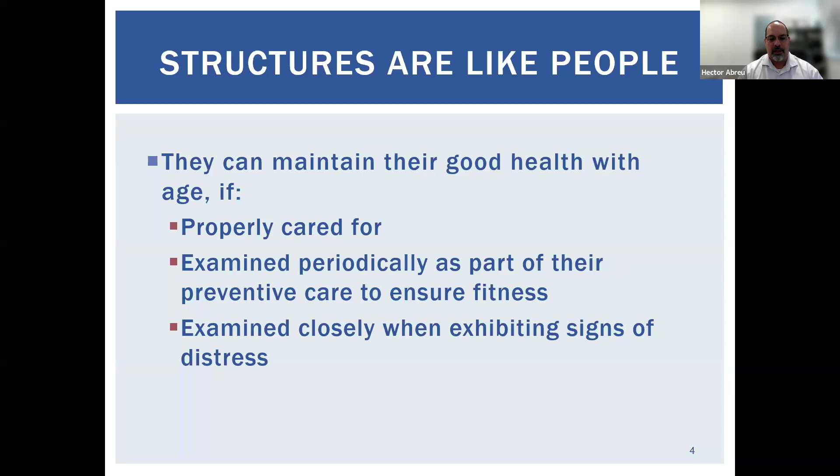Structures, like I said, are like people. They can maintain their good health as they age if properly cared for, examined periodically as part of their preventative care, and examined closely when they exhibit signs of distress. And we're going to show a couple of pictures about distress and what association managers can do for their building, including their maintenance. We're going to have a plan for that today.

Like people, all structures deteriorate with time. If you have a parking garage, you're going to have car loading coming in, coming out. You're going to have heavier equipment than it was originally probably designed for. Those kinds of things put stress on a building, and that kind of movement creates some kind of deterioration on the building.

Exposure to the elements. We live in Florida. We get hit by hurricanes almost every single year, right? Either on the left of Florida or the right of Florida, we all get hit at one point or another. In addition to that, you can count on weather change. Right now in Fort Lauderdale, we were 55 degrees this morning, and we're going to go up to the 80s. That causes the material to move because it will shrink and will expand, right? Those are the kinds of exposure to the elements your building goes through.

Aging of material, as with everything else, and like probably all of you have learned so far, we go through a life cycle of material, right? What is the life expectancy of those materials? What is the life expectancy of your paint, your waterproofing, your roof? Those are the aging of the materials that protect our building.

Wear and tear from normal use. That will be if you go to your walkway, how many people go out to the elevator? Usually when you go to a building, you will see that the elevator area is beat up, while the area farther away from the elevator looks a little bit more pristine, right? That is because of wear and tear. People are coming in and out every single time, in every single area. That creates abuse on the building as well.

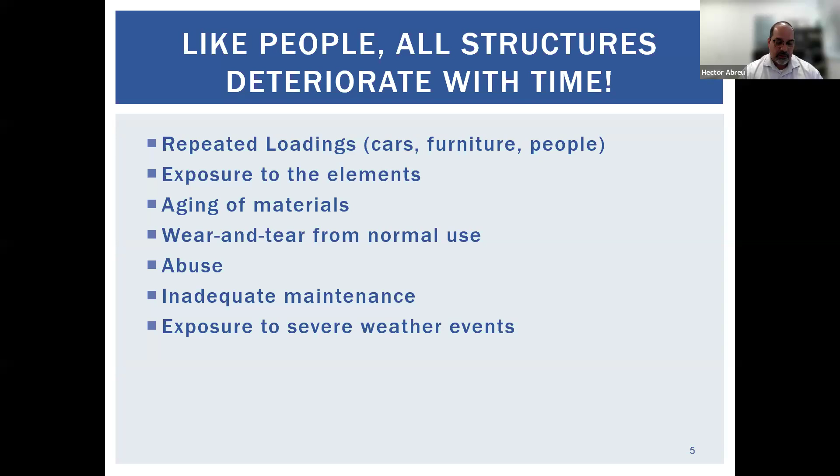Inadequate maintenance, exposure to severe weather, like we talked about before. Inadequate maintenance will be, hey, I know I got a patch there. Instead of calling a reputable contractor, no, let's find something at Home Depot, put it there, cover it up, and that's it. That will continue to deteriorate the building and will cause strength reduction in the building, which is something that we don't want, and most of our panelists here do not want to be confronted with either.

All structures deteriorate with time. During hurricane season, we get very strong winds. We get a lot of wind coming in. Wind comes from different directions during our hurricane seasons, right? So we're going to get water in through the windows. We're going to get water in through some openings.

2 years ago, 3 years ago, we got big storms that happened one after the other on the east coast of Florida that took away almost half of the east coast. A lot of seawalls in Daytona were lost. A lot of buildings were on the verge of collapse due to losing their seawall. Those seawalls were there for 50, 60 years probably, and this storm just destroyed them. You can go back to the news and see them. I worked on 2 of those buildings in particular, and it was a challenging event for those buildings.

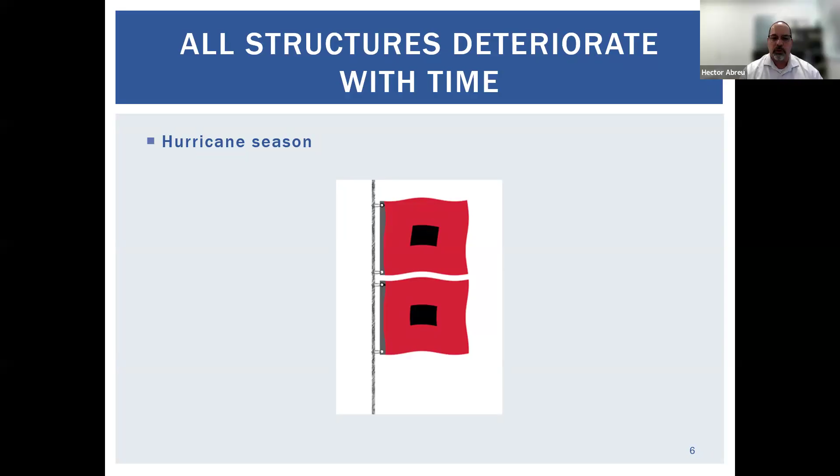So we had to reestablish safety for the buildings. Both buildings were evacuated. In both buildings, people are back in their units as normal nowadays. But those kinds of events do affect a building. Those kinds of events do create additional water intrusion into your building that will create aging and create damage to the building.

Deterioration may progress to the point of compromising. What are we compromising on a building? We're compromising strength, stability, the appearance of the building, roof leaks, piping system, water lines, fire sprinkler system. So when you just start getting deterioration, at the beginning it will be very subtle, right? You will see maybe a rust spot here, some cracking here, that's fine.

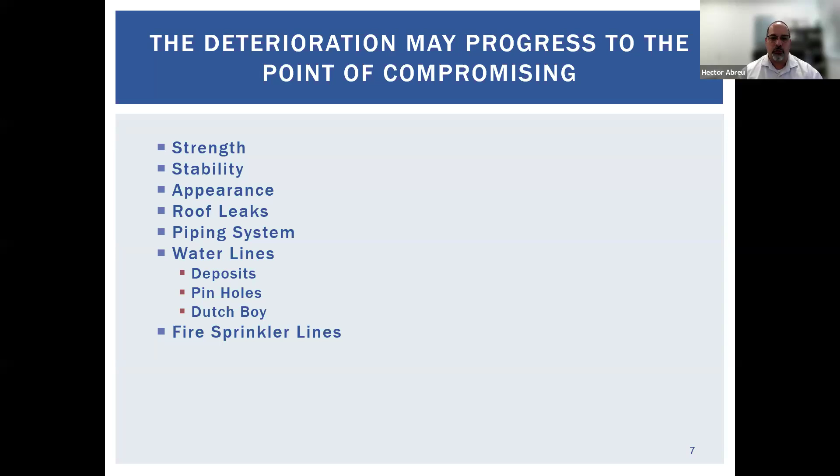Let me back up there a little bit. If I'm going too fast, please let me know. I tend to talk very fast. If you don't understand something, let me know, because I'm Puerto Rican, so I translate a lot in my head, and I make up words sometimes. So feel free to say, hey, what the hell did you just say, man? That's fine by us, okay?

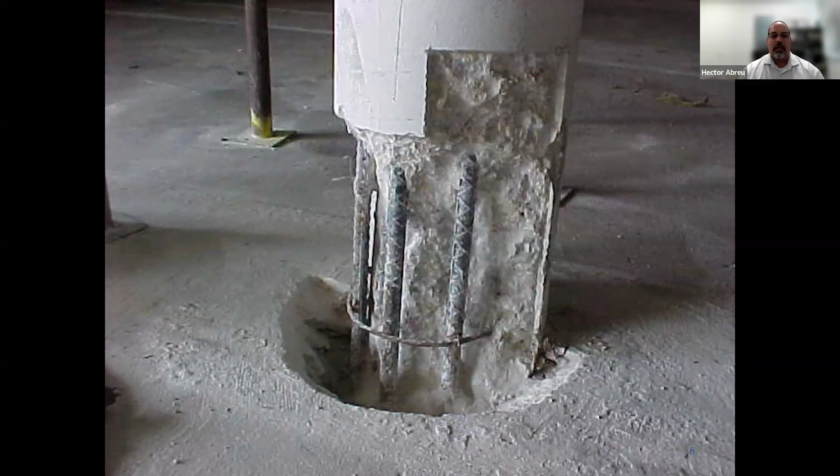Possible causes for distress. We've got errors in the original design, inappropriate materials for the environment, shortcomings in construction, imperfections in materials, natural regression of building material. So what are errors in original design? When an engineer designs something, there's a group of engineers that design it. No one is perfect. Things might be left off. That sometimes happens. Sometimes it's caught, sometimes it's not. I'll give you a simple example.

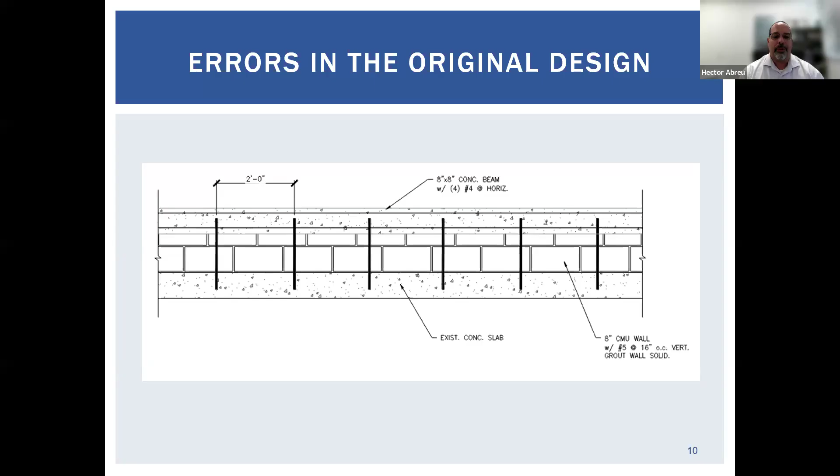Those are the kinds of things that have to be addressed, because now it's up to the interpretation of the contractor when he's on site, right? Again, you don't see a lot of those kinds of errors. Nowadays, with programs and everything, we become more and more efficient, but they still do happen. Mistakes still happen here and there.

Inappropriate material for environment. Here in Florida, we never use salt on our streets, but in New York, areas where we get snow, you will see that all the time. So imagine if you have a building and you're throwing salt when December comes, because cold weather is coming in. That salt will destroy your concrete right away. And it's an inappropriate material for our type of environment.

The same will apply to the roofing material that we use. The same will apply to the painting and coating that we use on our walkways and waterproofing. For the people that work with the windows, it's not the same kind of window that we're using, especially because down here, and Ben from City Quiet can chime in, we have hurricanes, so it has to comply with the load and the wind load that we're gonna suffer.

And to add to the insult, Florida keeps changing their code almost every 3 years. We have a revision on the code, and this year they bumped up the numbers, and now they included tornadoes as well, which is another load that originally was not included in the previous version of the code. So those kinds of things affect how your building is aging, how it's maintained. So you have to be very proactive on your end.

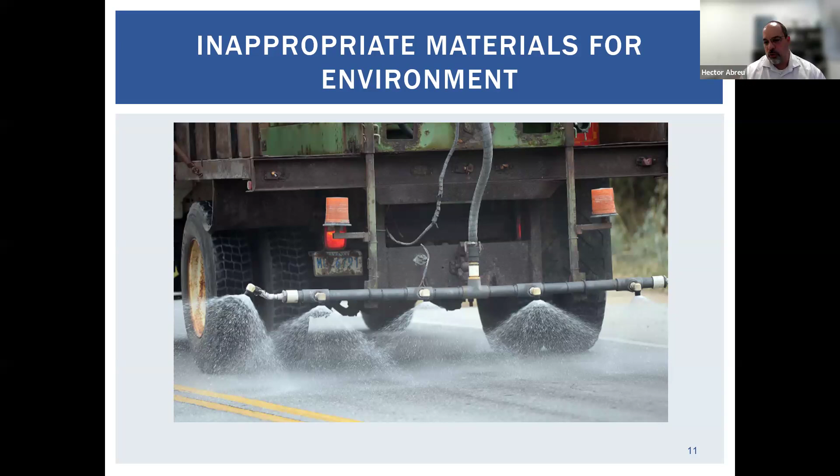How are we gonna do those? A specialist, an engineer, an architect, someone like Ben from City Quiet can come in and say, hey, you know what? That window that you're planning on putting there, that's not the right one for this environment. You have to have something that is impact rated. You have to have something that withstands 150-something miles per hour wind. The one that you want to put from Home Depot is not going to work. You have to do something a little bit beefier. That is inappropriate material if you don't follow those kinds of recommendations, right?

What is inside our buildings? Well, before we go there, any questions so far?

The only question that I have here is general, and it's just that I believe board members, besides the 4-hour certification course, are required to have 1 hour of additional continuing education. Does this course apply for board members as well? If the question is for me, I will have to find out. I don't have that information from my company at this point, but I will find out. What's the question?

I'm sorry. The question is board members are required to have a 4-hour certification course in addition to 1 additional hour of continuing education. Does this course apply for board members as well? No, it does not. And the reason being is because the additional hour is a class for the managers in a legal update position. It has to be a legal update. Perfect. We're good to go.

Hector, just as the moderator, to jump in here for a second. I love the fact that you mentioned that sometimes an engineer will create a specification or a project manual, and a contractor like myself will come to the table and say, hey, we might have a better solution for this application from a value engineered standpoint or from a warranty standpoint.

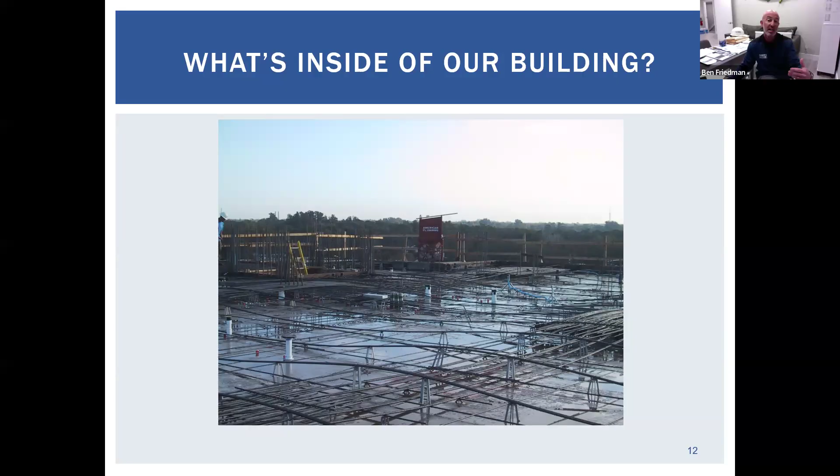So we love when you guys send out project manuals, and for all you property managers and board members out there, we love when engineers give their greatest suggestion, but they also throw in their 'or approved equal.' That allows us to come back with something else other than specifically what the engineer thought was the best fit for the application. So I really appreciate you saying that, because I suggest that to board members and property managers when we give these types of classes, that's something they should ask their engineer to put in their project manual or RFP.

Correct. And in our case in particular, we're not married to anybody. So let's say we recommended a window of such and such type. Any engineer will tell you at least it has to comply with code. Anything above is fine. Anything below is a no. And the code, remember, is a minimum requirement for any building. So we always try to do a little bit better than that, because we don't want just the minimum requirement.

And going with what Ben said, that's why we have or equal, because they might come in and say, you know what, for that type of window, I can probably put this one, maybe $100 more expensive, but it will give you a different rating. And it will be a lot better for the association. And I'm making the numbers up. Please don't quote me on those. I don't know if it's 100 or 1,000.

Okay, so moving on. What is inside our buildings? And this is going to be talking more about our PT cable. So a building in Florida, South Florida, most of our buildings out here are reinforced concrete. That means that you have cementitious material with rock, with cement, with other properties on it, and rebar inserted as well. That is called reinforced concrete.

Nowadays, a little bit further north in Florida, Orlando, Jacksonville, and all that, you got wood frame buildings. There are different kinds of material used, different kinds of analysis that have to be done. No matter what, a building is still designed almost in the same condition: foundations, supporting members, which are columns or shear walls, beams, and my deck. Usually that's the way it goes.

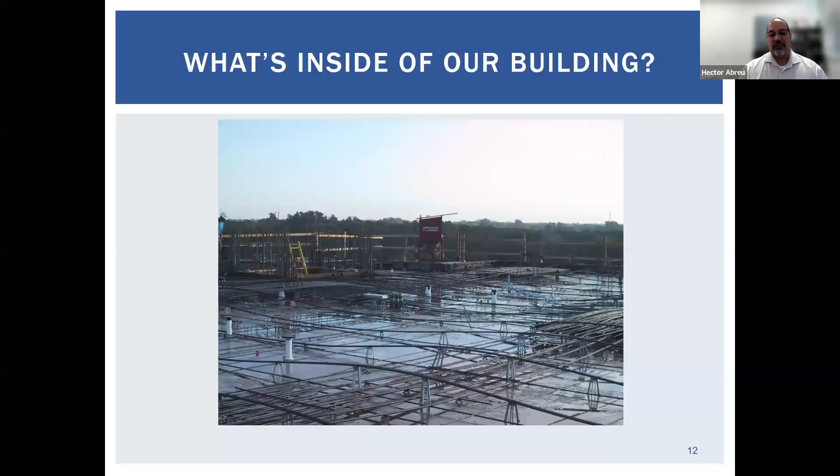So instead of doing that, what has been done in the industry is putting the cables inside. That cable creates more compression on my concrete, which, when you do the analysis, will reduce the size of the concrete and the amount of rebars that you have to put in. So it will be a lighter structure coming down on those columns. Let's say that instead of having a 6-foot diameter column, now it could probably be only 3 feet wide. So it reduces quite a bit of weight and additional material, so it makes it cheaper as well. That is a good sign for PTs, right?

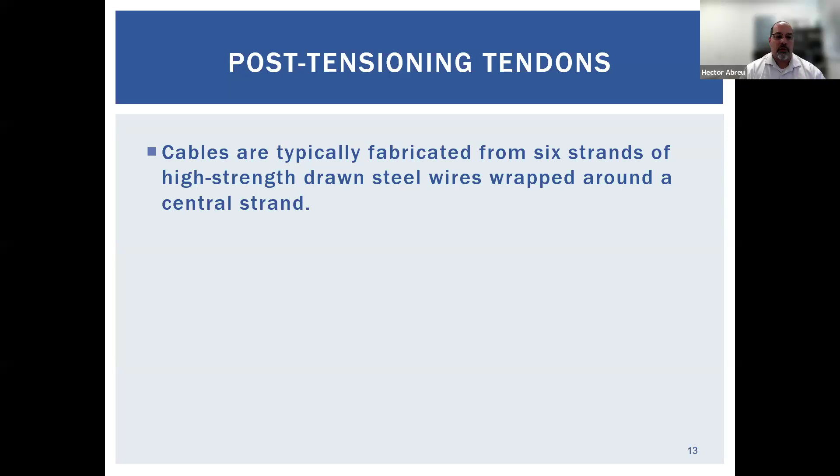My PT cables that are inside the buildings are typically fabricated from 6 strands of high-strength steel wire wrapped around a central strand. Cables are impregnated with corrosion-resistant grease and encapsulated in extruded plastic sheathing. So sometimes in some buildings, you will see the plastic sheathing of those PT cables at the bottom or on the top, and you say, what the hell is that? That probably is an electrical cable or something. No, most of the time it will be one of those PTs, and that has to be corrected. You should not have an exposed PT cable or the sheathing of that cable.

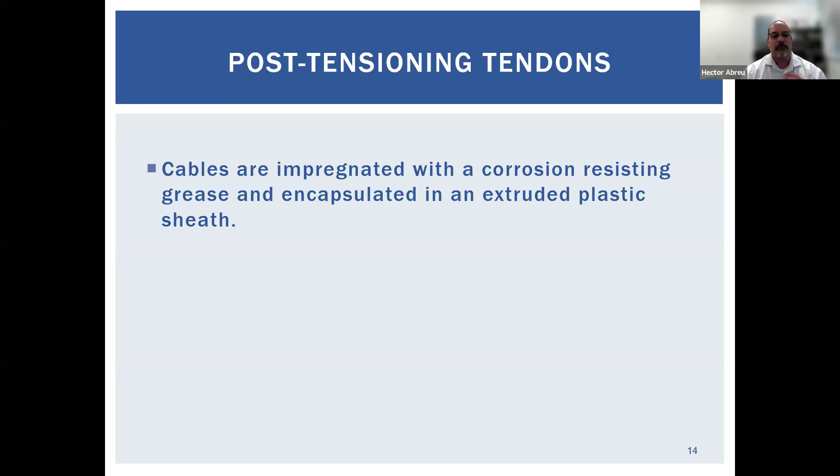Why? Because they are designed to be inside the concrete to allow the concrete to have as much compression as possible. Sorry if I'm going a little bit geeky on this side, this is an area that I like talking about quite a bit. So when you have those cables exposed, that means that the concrete is not really being compressed as it should be, and it should be corrected. There are different ways to fix it, even though that's not part of this presentation, and specialized companies that do this.

The fixed dead end of the cable is locked on one of the sides in a cast steel device at the factory. They come in, they put the cable in, and they will stress it from the other side. Okay, that stress is 25,000 pounds. That's a lot of force. Usually when you see the drawings, it will say 25 to 27 kips. A kip is 1,000 pounds, so it's 27,000 pounds. They are very, very dangerous to work with.

When you're doing renovation, one of the first questions that I will always ask my client is, is your building a PT? You as a property manager should know if your building is a post-tension building or not. If someone is doing renovation on a PT building, you should always ask them to have it scanned. If they're doing anything through the concrete, they should have it scanned.

I've been called on a lot of buildings because people were renovating their unit and hit a cable and it shot out of the end. That would be the best case scenario, that it shoots out at the end. Others are not that lucky. We were called recently to one where someone was doing a restoration and the PT cable came out of a living unit. So those kinds of things happen when you don't know that your building is PT.

For those kinds of scenarios, there are ways to determine where the cables are, so that we don't hit them. We worked on one where a cable shot out of the end. When we took it out and measured the length of the piece of cable, it ended up being a bathroom that was renovated. A brand new bathroom; we had to open it up and break the whole new shower that they put in, because we had to fix the cable.

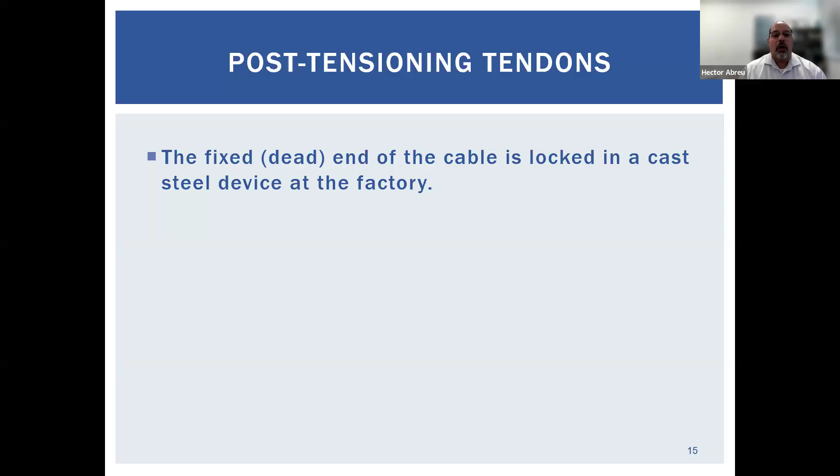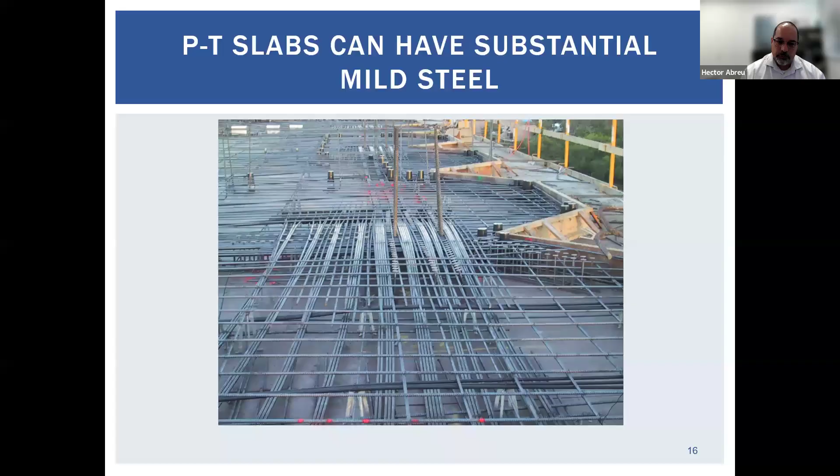At the end of the day, you still need reinforcement. You still need rebar, and rebar will corrode, so we have to protect that as well. PT cables exert compressive force on the concrete slab, resulting in a reduced slab cross section. A reduced section is lighter, which further reduces the required sections for beams and columns. Smaller sections mean less material, smaller columns, lighter foundations, and lower cost at the end. That's why we engineers like using it a lot, because it's a win-win-win for everybody. However, you have to keep up maintenance on them.

Go ahead, Peggy, I'm sorry. You're muted. Sorry, I did that so I wouldn't talk over you.

I was just wondering if infrared cameras are used for identification of those cables. Yes, if not infrared, you will use a GPR, ground penetrating radar. Infrared will not tell you where the cables are, because infrared just shows a difference in temperature. But a GPR will tell you where a cable is, quite accurately. Not exactly, but accurately enough that you can avoid going where the cable is, and most of the time it can tell you the depth as well.

The other thing is, is it regular practice to use that technique? Are the architects using that for their inspections, or do they call in an engineer to help them with that? You mean for the design? No, for the scanning. The scanning is done by a different company. It's not the engineer that does it. There are engineering companies that do, but usually it's a subcontractor that we use that goes out there and scans them. Okay, thanks.

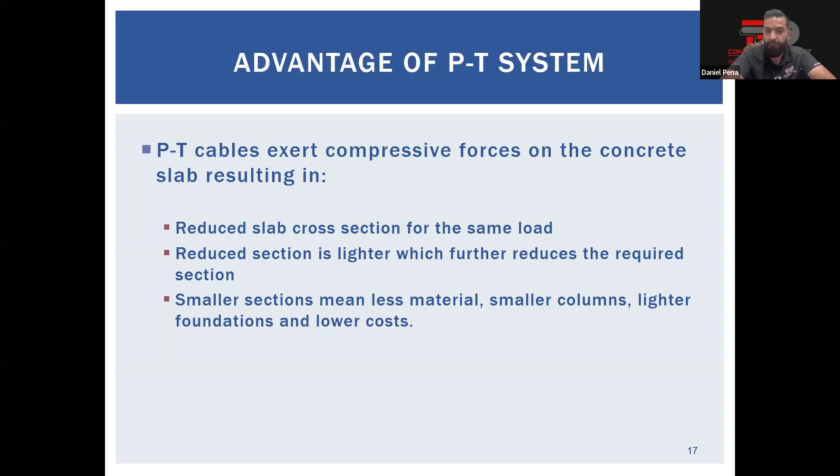Sure. I appreciate it. I think I do have one later on.

An advice would be, if you walk your building and you look at the edge of the balconies, an edge anywhere, you will suddenly start seeing like a Coke can kind of effect, a halo kind of effect. It is rounded, circular, and it starts getting dark around it. Usually that will be an easy indication that that's a PT pocket. Why is it turning dark around it? Because the grout that was used is failing, moisture gets in there like water, and it starts getting dirty.

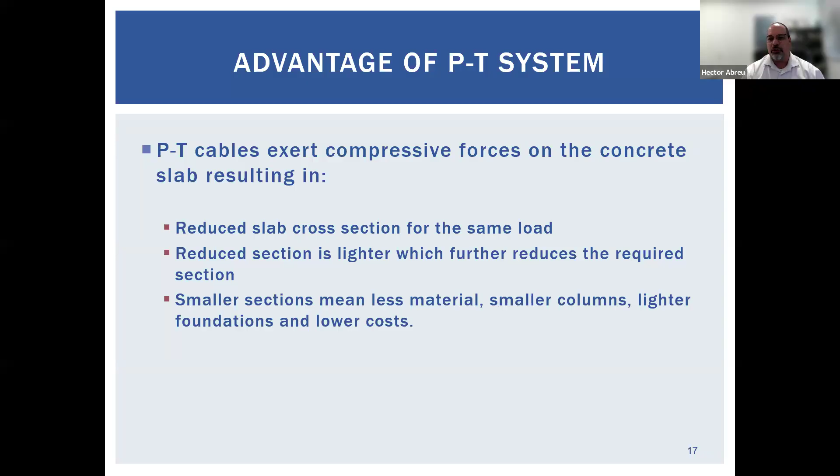If you see that Coke can kind of halo effect, that will be an indication that you have PT cable. That's very easy to identify on a building. Granted, if you just painted the building, you're not going to know until a little bit later on, but that's how you will usually quickly know one thing or another.

So corrosion is critical. Sometimes when they constructed it, the grout that they used was not the correct one. The grease cap was not used. And in older buildings, this becomes more critical because the product has changed, like we talked about a little while back. So corrosion is the most critical part, and keep in mind that you will have rebar attached to it. So if the rebar is corroded, it could affect the cable.

How to fix it becomes very detail oriented for someone like Daniel and their company to come in and fix it, because you have to work around a cable without breaking it. Cable repairs are very expensive, and you should do everything you can to keep a building as safe as possible to avoid working with PT cables as much as you can.

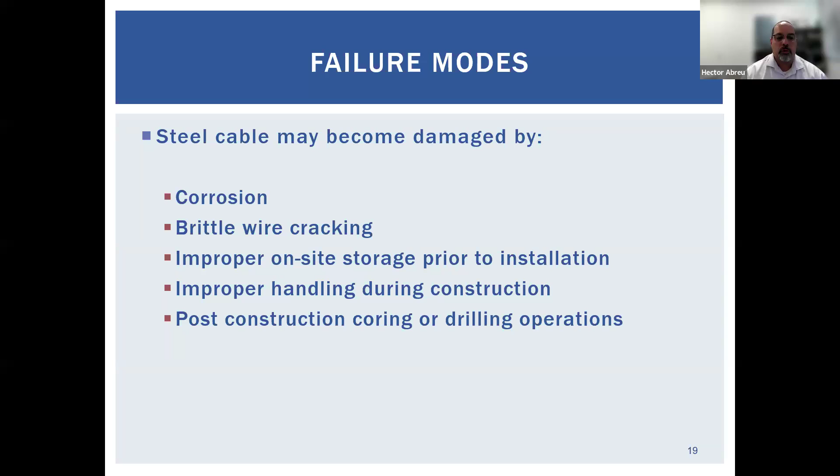And when you keep adding that up, me as an engineer doing restoration every day, we do not want to take that risk. So if I look at a cable that was broken, I will always tell you, fix the cable, because you don't know what's going to happen tomorrow. Two units down, the guy might do restoration and break another cable, and now where is that load going to go? We don't want to create that kind of scenario, and you should not make that decision either. So I will always recommend, let's fix the cables.

Warning shots will be exposed PT strands, and we've got a picture of a PT strand coming up; spall, broken concrete revealing the steel; and balcony tile dislodged. What that means is the balcony tile will suddenly pop up and you say, that's strange, it was all fine until yesterday. I heard a chipping hammer and suddenly my tile came up. Well, this might be an indication that something broke.

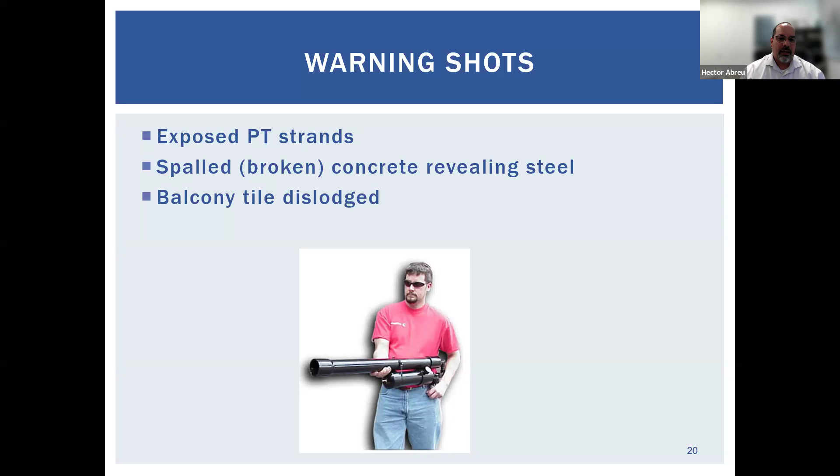If we look at this particular picture, you can see this section here. Let me see if I can do this. Laser pointer, okay. This section here, this is an older building and the cable is exposed right there. This is a metal section that they have for something else, but this is my cable. This is critical now for us and for the safety of the building.

See that it's very high up? Look where my column is. It's very high up because we're right there at my column. So yeah, we were expecting it to be high, but not so high that it came out of the concrete. Now the contractor, the engineer, we have to shore this place up.

They're gonna open this up, lower the cable, and then retension it again, replacing the cable because this is all corroded. Corroded cable is not a good idea either, like rebar, right? We have to replace some section of rebar. The cable is the same thing. Remember, it's 25 to 27,000 pounds the cable has. It's a lot of strength there.

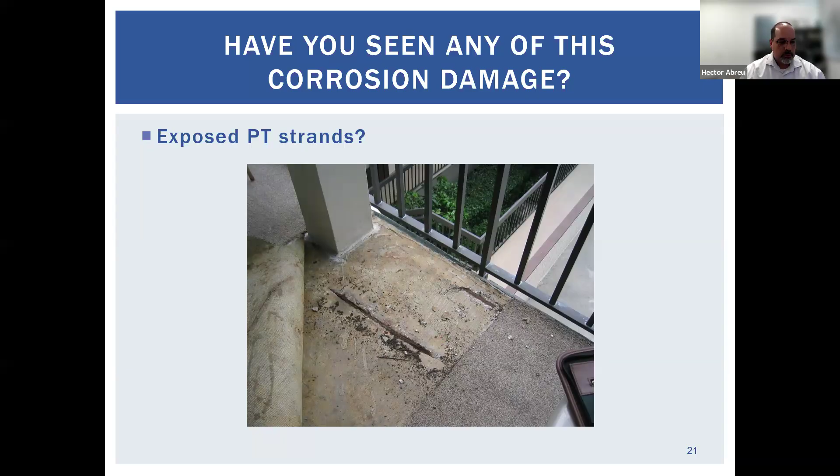Let me see if I can do this now. Nope, doesn't want to move. Okay. Yeah, okay.

On my edge here, like Daniel was saying before, we got our locking system for my PT cables. Behind that lock, we have two sets of rebar that are what they call stub rebars. They will help the concrete to withstand the load that is applied to it from tensioning those cables, right? Because it's going to compress the concrete. So those rebar, if they get corroded like something similar to this one, we have to fix them.

Now, this becomes a very critical repair because we got what we call heads of the PT cables right here on the edge. We don't want to dislodge the cables or anything. Sometimes what ends up happening is that we have to put a lock on a cable somewhere to reduce the tension, fix the area, and then tension it back again. It's very complicated to do that. That's why maintenance is critical on all of our buildings. And Daniel, you can jump in, my friend.

No, I want to ask you to explain to everybody that sometimes we lock off the cables, not because the cables are bad, just because we need to detension the concrete so we can perform a repair on the concrete. And it's like, by the way, we have to fix the cable. If you can explain this more in detail, because I'm facing this a lot in my jobs, people asking me why you are replacing the cable or re-splicing a tail when it was good and the grease was still there, but I was always trying to explain it's safe for us to chip. We have to kill that or lock it off. If you can just stop on this, please.

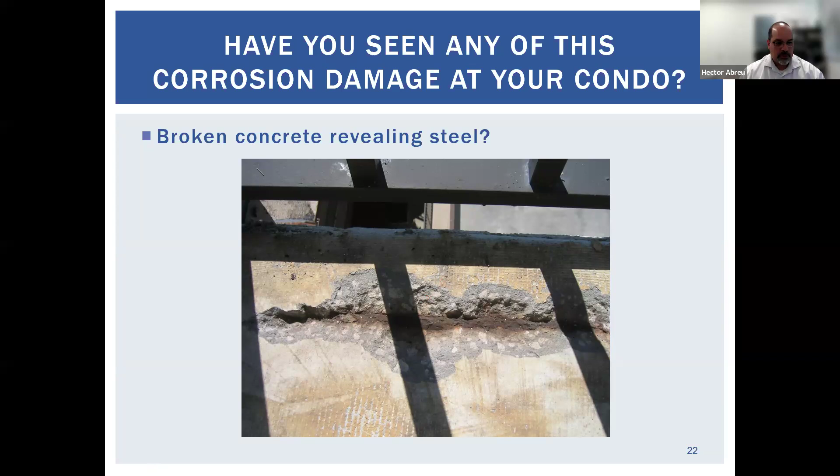Okay, so have you seen any corrosion damage? What's underneath your balcony's indoor-outdoor carpet? Typically we say don't put any carpet outside. They will hold moisture. When it rains, it will not dry properly. It will let all that water and salt and everything go through, and it will destroy your concrete. It will start what we call spalling. And I'll describe this a little bit further down.

Spalling is the detachment of a section of concrete from the rebar or from the main section of concrete. A situation like you're seeing in that picture is a spall already. It's already exposed rebar from a spall. It originally started to crack. Then it sounded hollow, because it creates like a rash on the floor, if you want to think about it that way. And then it dislodged completely, exposing the rebar that was corroding beneath it. Rebar, and we'll explain this later, will expand up to 20, 30, 40% of its size.

Concrete is great in compression. Once it's in tension, when the rebars start expanding inside, it will create tension. Concrete is not good in tension. It will break, and that's where you get your spalling. We highly recommend that you do not put any carpets on your balconies. If you have them, start talking to the board. Have your engineer come out there and talk to them. This is going to create a problem later on. Let's start working on this now.

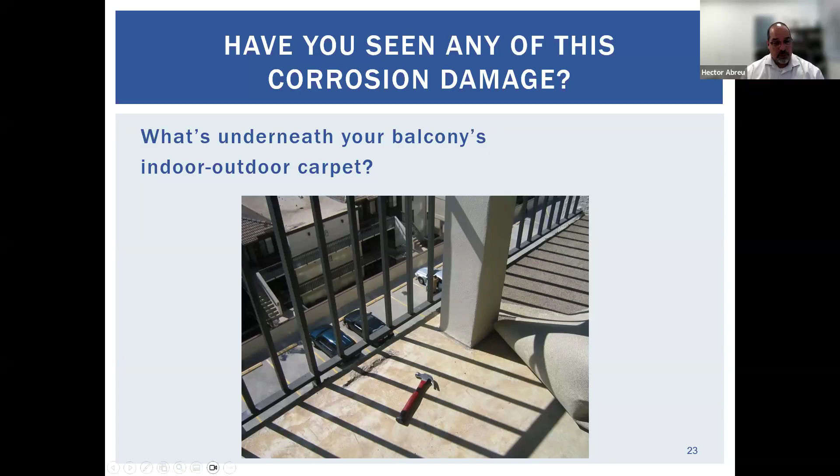So a lot of associations are moving to not accepting tile on their balconies. Other associations have moved to, hey, if we're going to put tile, this is the procedure that you have to follow, and we're going to hire someone to inspect that you follow that procedure, because they want to extend the life of the building. Doing concrete repair is very expensive. A cubic foot of concrete nowadays can go up to 500-something, per cubic foot. It's a very expensive process. Most of you CAMs have worked on projects like this, and you know how bad it can get. So that's why we're moving away from those kinds of situations.

Awareness and prevention. This is the part that most impacts you guys, and I tried to put a little extra on this, so you really can do helpful things for your building. So, preventive building maintenance responsibility. You can do a periodic visual walkthrough with the CAM, with the building engineer, or the building maintenance committee. There's always a committee in buildings nowadays, right? So if you have a committee, go out there and look at your building every, I don't know, 3 months, 6 months. You can do it twice a year, walk the building and say, last time I don't remember seeing that.

What was there before? Take pictures. Pictures are great. They're free. Everybody has a phone nowadays. They're free, and you can save them on your computer. Easy as that. And I'll show you how you can save them later. But take pictures, because you're not going to remember what you saw 6 months ago or 3 months ago.

Walk your buildings. Your maintenance crew are usually the people that know your building better than anybody else. They walk your building every single day. They know when they see something strange. They know that crack wasn't there before. Those are your first signs. So the board of directors' motto is to maintain, protect, and enhance the value of the property by enforcing the governing documents while promoting a spirit of community. So if that's what they're supposed to be doing, why are we not doing it?

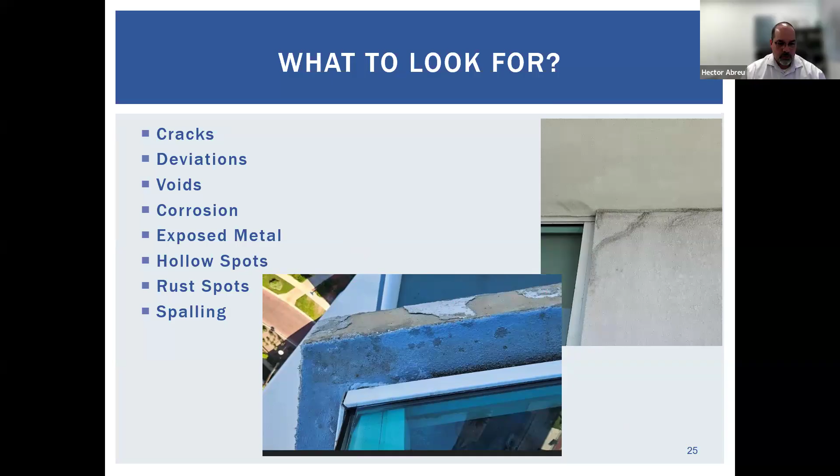So if I can move this, let's see. So you walk your building and suddenly you see something like this. Well, that's a big indication that something is going on. You see, we have a crack going on. You got rust coming in. That means that my rebar behind has an issue inside. If you look at the slab edge, you see a crack right here. Why is my slab edge breaking apart? That's not a good sign. I got rust coming through because I see bleeding here on that side.

You take a picture, send it to your engineer. Your engineer should be capable enough to say, yep, you have a problem, you have to fix that. Don't let the maintenance guy paint over it. Please don't do that. Allow the engineer, allow a reputable contractor that can do the work, come in and fix it. It's cheaper to fix this one than let it go and go and go.

On this picture in particular, this is one balcony, but if you look up, there's a section here that is lost. There's a section here that looks strange. Granted, this is a 26-story building. You're not gonna see the top of it. You can have some binoculars. You can walk on the balconies. You can always say, hey, with the fire inspection that we do every year, we're gonna look at the balconies, right? That is the association being proactive.

On this picture, I'm sorry to say that it doesn't look that well, but you can see kind of a crack here, but really this is bulging out. And if you tap it, you take a hammer, a golf club, a broom, and you tap it, it's gonna sound hollow. It's gonna be a very unique sound. That means that we have a spall and it's detaching. That means call your engineer. Take a picture, call your engineer. Come on over, look at this. Can you help me out?

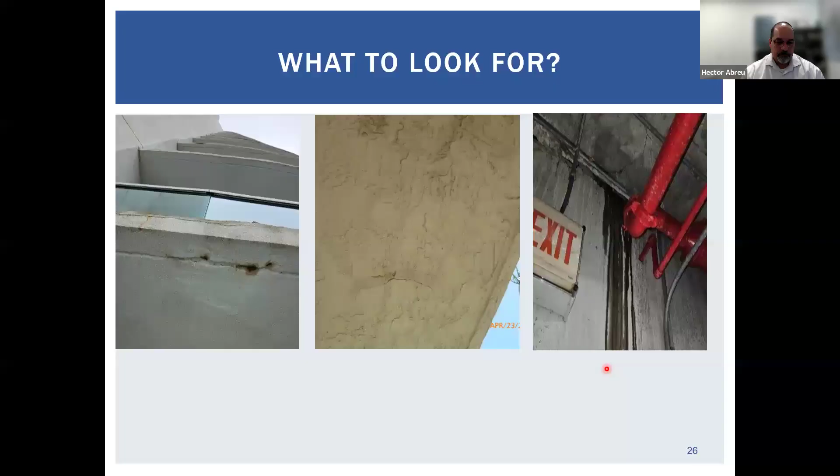So when to bring in a consultant and why? The consultant will analyze the structural performance of different materials and geometries to determine the best design solution. We will look for problem solving. We'll look how to solve the problem that you're having on your building. And we'll look for safety, crucial for ensuring the safety and stability of a structure.

I always tell my clients and my property managers, I usually don't stop a job just because, unless there is a safety issue going on. If I see the contractor working on a PT cable without releasing the strength of the cable, if I see a contractor working without safety equipment right next to an edge, I will stop a job because

safety should come first. If I see a building, and I have seen my share, where the columns are bad, the beams are bad, and the building is starting to tell you everywhere, hey, I cannot support the weight anymore, I will tell you, and we will have to inform the authorities. We are liable if we don't say that.

Surfside, I'm sorry to say, all of you have seen a lot of reports on it. What happened to the engineer? Even though the engineer said, hey, this is bad, we have to fix it, he still has to pay for it. For whatever reason, he was supposed to enforce the association to do the work.

How to do that? I cannot get my wife to get something done. Imagine getting an association to get something done, right?

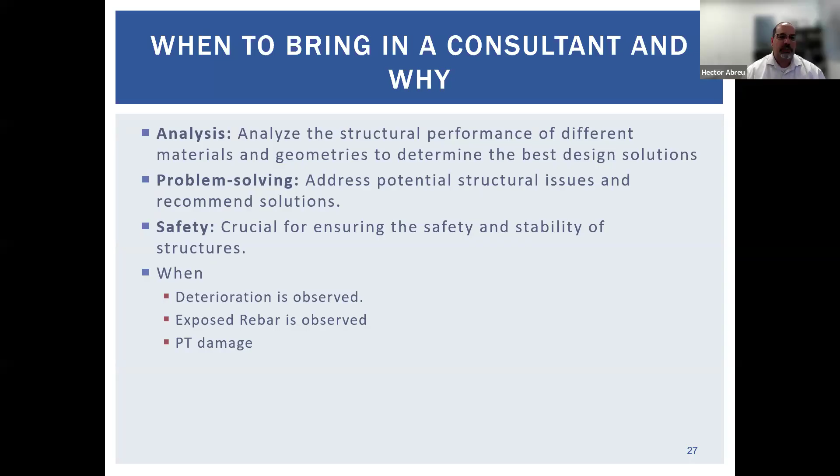So when you walk your building, you're going to do a structural and building system condition assessment. That's what we call a survey, right? When you call the engineer, that's what he's going to be doing. He's going to be doing a survey.

We're looking for deterioration on the structure. We're looking for damages. We're documenting those damages, and we will present it to the association. What the association does after that is based on the board, right? But the intent, if the building is in bad condition, is to move on to a restoration job.

If you're going to units, please take a picture of the unit number before you go in. Take your pictures and then come out. That way it's easier to remember if it was unit 101 or 502, because they all look alike. So the picture of the unit number, the balcony, and you come out.

If you see something, sometimes cracks are very difficult to take pictures of, especially if they're very thin. So you have to zoom in. You can zoom out and then put your pen and say, right here is the crack, and you take a picture. That gives an idea, if you send it to your engineer, of what he is looking at. Because we need to try to figure out what we're looking at in the pictures that you send, right?

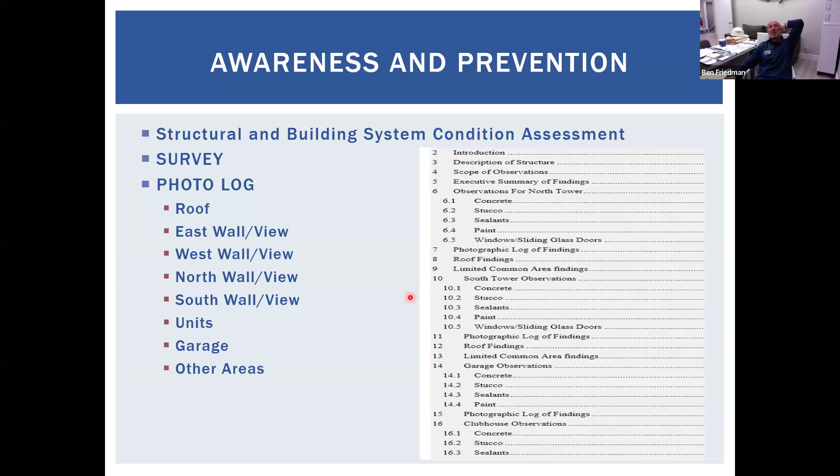Peggy, the anonymous attendee would like you to please repeat your statement about the fire inspection requirement. Well, I can't remember what year it was, but I want to say 2 years ago, could have been 3 years ago, the law was put into effect that the fire equipment had to be inspected annually for condominiums. And who is responsible for initiating the inspection? Is it the fire department reaching out, or is the condominium responsible? No, it's the condominium.

Thank you. So just put it on the schedule, every January or February. Maybe your annual meeting will be a point of remembrance to remind yourselves that it needs to be done annually. It's a minimal expense when you think about what could happen as a total disaster. So I highly recommend it; the law should have been in place years ago, in my opinion. But just make it an annual thing to do.

All right, Hector, you are all clear. Thank you, Peggy. Thank you, Ben.

Thanks. So on a survey, when we go out to a property and do a full survey, what are you supposed to expect from us? You're supposed to expect a summary of our findings. Some summaries are more detail oriented, some are a little bit less. It will depend on what we find and what you want at the end of the day, right?

So the survey should tell you at least what you found with the concrete, the stucco, the sealant, the paint, window conditions. It should have photos, because the engineer should go out there to take photos, and whether he did an inspection on the roof or not, and the limited common areas that they looked at, right?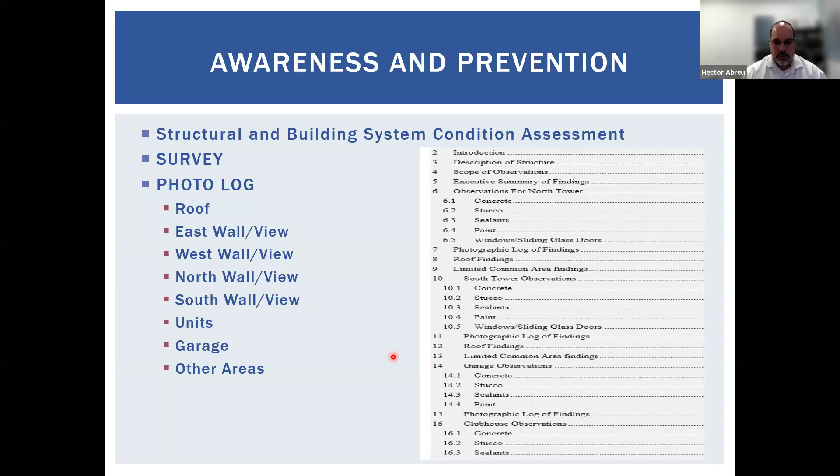So when you see your engineer out there, and you see my beautiful face out there going with my team to look at a building, there are different ways that the engineer should evaluate. Yes, there is the visual only, like we're doing for the milestone and SIRS, a visual walkthrough only. So we're looking, and whatever we think is bad, we'll mark it down and continue on. You will see a lot of people, and I'm a fan of using the golf club. The code requirement to do in-service structural evaluation is usually with a hammer. But can you imagine an 8-foot, 10-foot tall ceiling? A guy like me that is only 5'8" and shrinking will probably never get to that ceiling, right? Or bending over for the entire catwalk, right?

So the purpose of the hammer test is for sound. We're looking for hollowness in the concrete. So the hammer is replaced with a golf club because we get better reach. Nowadays, there's also the little card, the laminated stucco percussion something. And when you roll it down, it's like hitting the concrete the whole time it is moving, and it creates the same hollowness. And the other option will be drag chaining. You will drag that on your deck, but you cannot do that on a wall or a ceiling. That's why this other equipment will help you a lot.

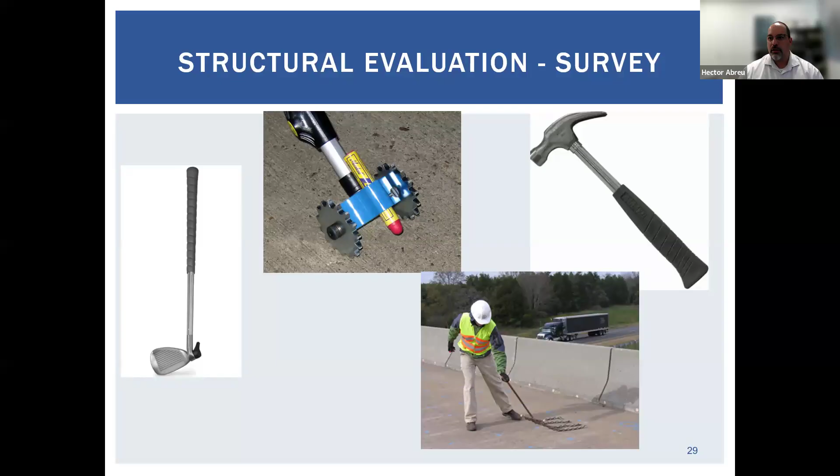So moving forward, let me see, because my computer decided not to work right now. Okay, I can use the keyboard.

So what are you going to do when you start all this? We all know now that the SIRS have come in and affected everyone, for good or bad, depending on how you look at it. So what are we going to do as preventive maintenance? Definitely we want to clean our building. That's not here because we're talking straight to the SIRS. But as a property manager you can recommend cleaning the building every 6 months, washing the buildings, letting the owners wash their balconies.

We had a building up in Daytona that had a day per elevation: the penthouse on Monday, the next floor Tuesday, Thursday, because the dirt continues to come down, right? So they cleaned their balconies per day, moving down the building, taking all the salt out. That is great for your building. If you cannot do that, have your maintenance crew keep track of your building, but you should have a maintenance plan such as cleaning the building. Before you even do the repairs, you should have a budget. Before the SIRS and this new law, people were doing assessments or not doing repairs at all.

We're going to push it for next year. And your building keeps deteriorating until you are either condemned and cannot go back to the building, and we have seen a couple, or God forbid, some scenario like Surfside, right?

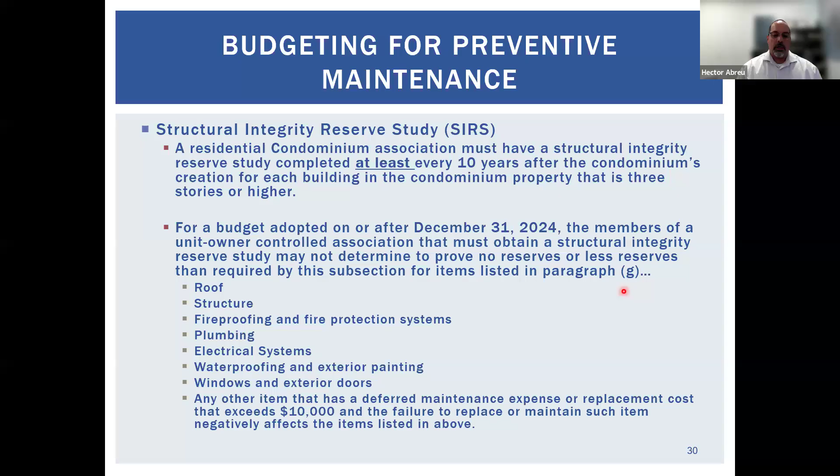The railing is not a structural thing, not necessarily. So why have it on the SIRS? So I move it to my capital reserve. Fine, but you're saving for it for safety. It should be here for a safety kind of concern for the person.

My turnovers and reserve studies. Turnover is when an ownership is transferred from the developer to a homeowner association or condominium association. If you all know about SIRS, turnover is typical. That happens way at the beginning of the building. Most of you here are working with existing buildings, so you're past your turnover part.

But usually when the developer finished the building or it has reached more than, I think it's 75% or 54%, something like that, from the developer to a homeowner association and they build the HOA, then it will be transferred to them and you should have a turnover study. There is a law for the turnover and it tells you what you have to follow. Then you do your reserve study.

This is not a SIRS. This is to provide current estimate of cost of repair and replacing major common area components, not on SIRS, over the long term. So the items that are on the SIRS are not going to be on the reserve study. Have to be two different ones.

What typically we have seen is that some association will say, hey, I agree that there are two different documents because I have to present it to the state, but to analyze the number, what I'm going to get at the end, I want both numbers combined so I can see what is my real number per year that I have to save. So we will combine them for them. But that is an extra step that we take to help the association out.

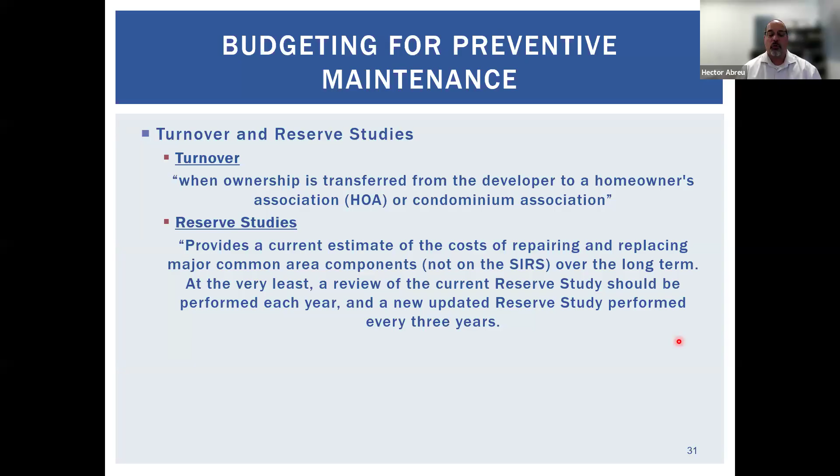Tariffs might affect the pricing, up or down. Who knows what's going to happen? A hurricane situation, a COVID situation might affect my pricing. So those kind of things you should be prepared, because when the time comes to replace your roof, to do concrete repair, to do painting, you want to have the money there and not go after special assessments.

Ask yourself, did we reduce operating expenses in some significant and lasting way? Do we have a reserve fund or SIRS? Is there any reserve fund? How much is it? What capital expenditure can we anticipate in the years to come? Are we balancing our budget by drawing down on savings or selling assets? That's critical. So again, it goes back to the same thing.

Your SIRS, your capital reserve will tell you by year 2030, we're going to replace the roof. It should tell you how much you're saving per year until you get to that point. Perfect. Now you have to evaluate it every year and tell the association, hey guys, we're low, we need to catch up. Such and such are not paying, or hey, you're not saving enough. You just said $500, but we need 1,000. Those conversations have to be there.

Now with the change on Milestone and SIRS, you are also liable for a lot of issues that happen with the SIRS and Milestone. You are also responsible for it. So be careful about that. I'm not an attorney. I'm not going to give you attorney advice, but please read the law. Please make sure that you're following it and keep track of what you're doing. Help the association make those decisions.

Prudent step: learn the ownership structure by law. We should learn what the board can do and cannot do, and must do. And hire a qualified professional. We got a couple of qualified professionals here that I know of. They're very good, they can come out and say, hey, I looked at your building, you should call an engineer. They really need it. Or you need an electrician, mechanical, life safety, whatever is needed. Let them go out there and help you out on your building. Let them be a service to you, because that's what we're here for.

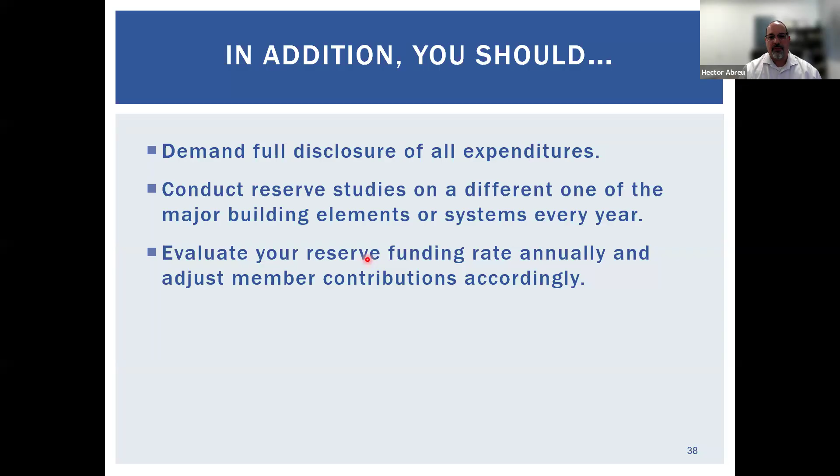Funding restoration and preventive maintenance: reserves, special assessments, and bank financing. Those are still options that you can do. Reserve is a little bit better. I'm always against getting loans, but loans are a big issue of big associations, right? People have used loans to alleviate the impact that the SIRS will have on them and keep a practical number for years to come. Instead of doing 1,000 something, it's just 500 because we're just paying the loan down, right? It's a good alternative if you don't have the money to do your assessment or your repairs on the building.

Undertaking building restoration and/or preventive maintenance project. Formulating the scope of the project and schedule the phases. So survey is the first one that we talk about. Hire your engineer that will go out there. He will look at your building. He will find significant deficiencies, problems, or ongoing maintenance concerns that are visible at the time of observation. He will provide you a report about what he found, and he will tell you how to move forward. Yes, we should do a project. No, you don't need a project, you just need maintenance. You and the board will decide how you're gonna move forward with that project.

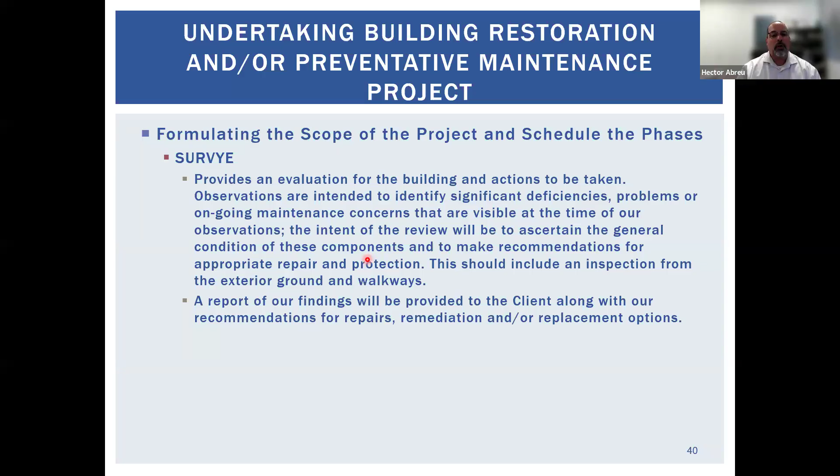Some association that I have worked on said, hey, Hector, I cannot manage $5 million of a project. What can we do? And in particular cases, we have different buildings or different areas. So we say, okay, priority number 1 is my structure, beams, columns, slab. Once I fix that, next could be a phase 2. So we're doing the stucco on the outside, painting, waterproofing. Phase 3 will be, I don't know, the roof or my railings or whatever. So we can try and help you out dividing by phases if you cannot do everything at once, but at least the major items should be addressed.

What will the project manual cover? Because I mentioned the project manual. The project manual is my specifications, bidding documents, and drawings. That's the way that we handle it here at Karins. We do our project manual that will have everything integrated and is based on the survey. So that job that we mentioned at the beginning that we did, 488, all of the data collected was put on a big table. It was shared with the board. And they said, okay, move forward with the project.

We did a project manual with all those quantities. That is part of my project manual. It will have my drawings there on how to fix the building. What products should we use? It will have the bid document so you can compare apples to apples. It's critical for you guys to be as transparent as possible, because this is where we lose the board.

And this is where people start screaming and we change boards. Be as transparent as possible. These are my quantities. These are the numbers from 5, 6, 7 different vendors. And that's what we usually get. Bid documents. At least most of your condo documents require 3. I always say 4, 5, 6. Why? Because some people decide not to show up. Some people decide not to provide a bid document on it. So at least you have more than 3 in case someone drops out.

You should compare apples to apples. We as an engineer, Karins at least, will not tell you, go with this guy. I will tell you, I see this number high, I see this number low. The decision should be made by the HOA.

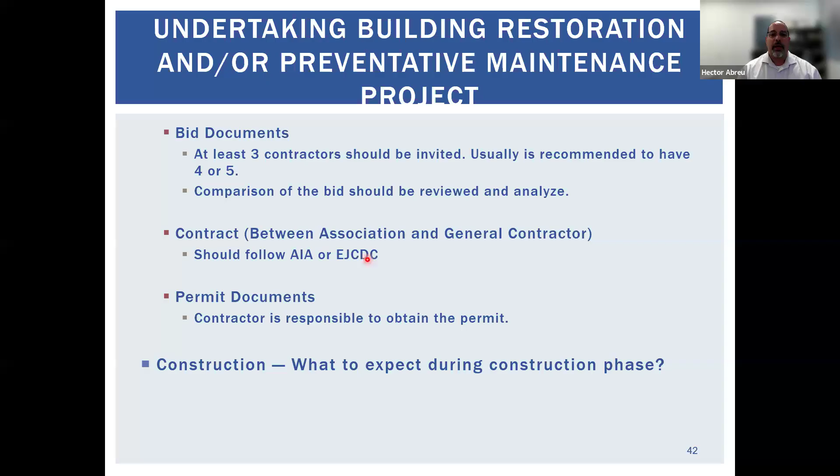What are you going to expect when the construction starts? Noise, noise, and noise. We are going to hear chipping hammers from the penthouse all the way to the floor, and people are going to be complaining to you. People are going to be screaming at you. Expect noise on your job. It's the nature of the beast to fix concrete. You will hear noise. There's no way around that.

Most of your contractors will help you out as much as they can. You typically will set up hours of work, of course, and they will help you out. They'll say, hey, we're going to be working on such and such section today. Make sure everybody knows, and they give you a 3-week look ahead for that. And you can at least give those owners a heads up if they want to go out or whatever. But expect a lot of noise, expect a lot of complaints, because yes, it will happen.

The pool will be closed while we're working on that area. Yes, expect that to happen. It usually happens for some reason in summer, which I don't get, but it always happens the same way. For longer than you plan. Expect change on a job. It will happen. There is change. Something that you did not plan for, that you did not expect, happens. It will happen. Feel comfortable with your engineer.

Talk to them. Let them reassure you that, yes, we're working through this and we're going to get it done. A guy like Daniel, a guy like Ben, when they're doing jobs installing windows and all that, sometimes it's not even their fault. The supplier didn't provide the material. So what are we going to do? We end up talking and say, how are we going to catch up? We're going to catch up this way, this day, that day. And we try to catch up to help you guys out.

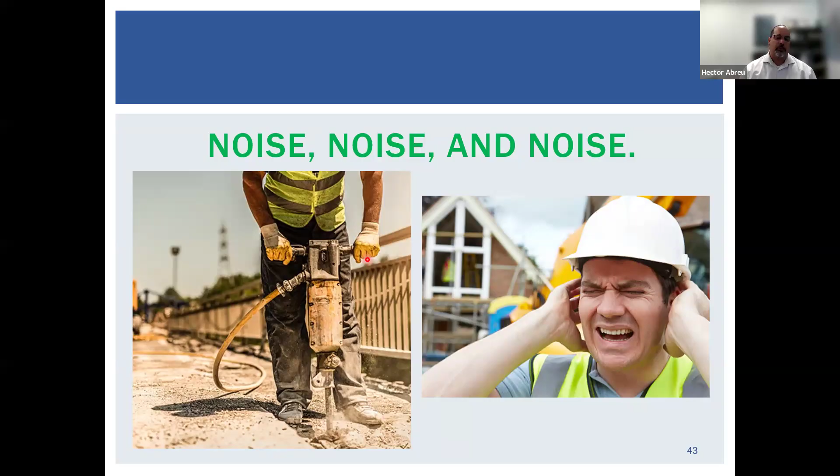We are supposed to be a team working for you. Sometimes it doesn't work that way, but we are always trying to look for that team to move the project forward. It is a project. Things will not happen as expected, and there will be a lot of complaints and noise.